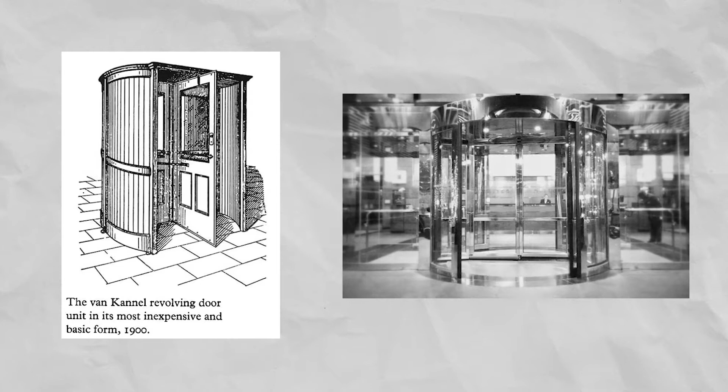Although it was innovative, it wasn't a solution for all the environmental problems of large buildings. Radical mechanical improvements were to be the only solution. It was necessary to have control of humidity from day to night, temperature from summer to winter, and air pollution.

From the first years of the 20th century, two outstanding buildings showed advanced environmental technologies motivated by an external climate containing a local excess of pollutants. The Royal Victoria Hospital in Belfast, Ireland, was the first air-conditioned building in the world, which was capable of controlling heat, humidity, and filtered air. The building used both mechanical and natural ventilation in a compact plan with minimum use of duct.

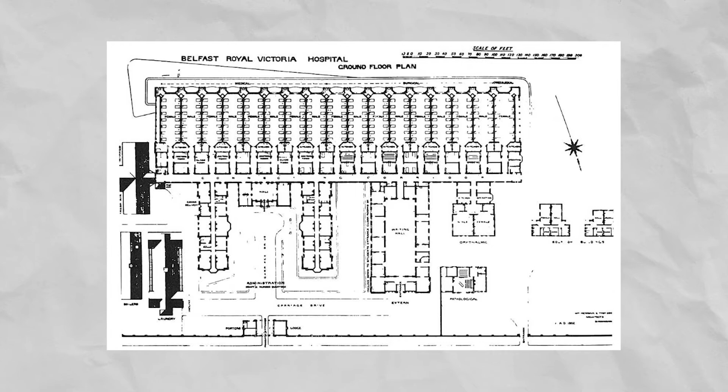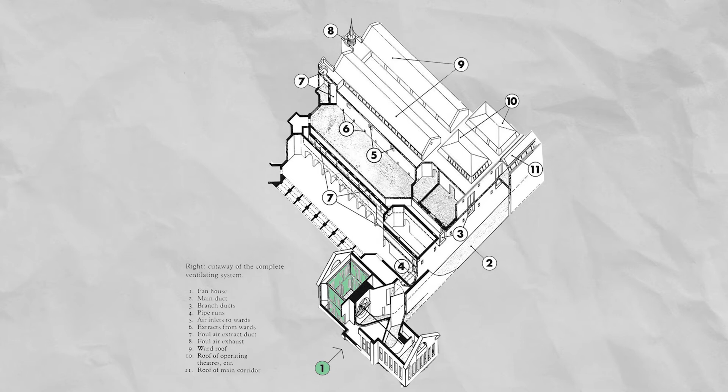Sets of steam engines operated by waste steam from laundry boilers drove exhaust flow fans on a common shaft in the engine room. Output from these fans fed into the inlet, then into the duct. From the giant duct, air moved into distributor channels that were set high under ceilings. From the distributor, air rose through risers in the walls of wards and was delivered through openings above head level. Foul air was disposed through extract ducts and finally left the building through vertical risers. The sprinkler system moistened fiber ropes, then sent the air to heating coils to control both heat and humidity.

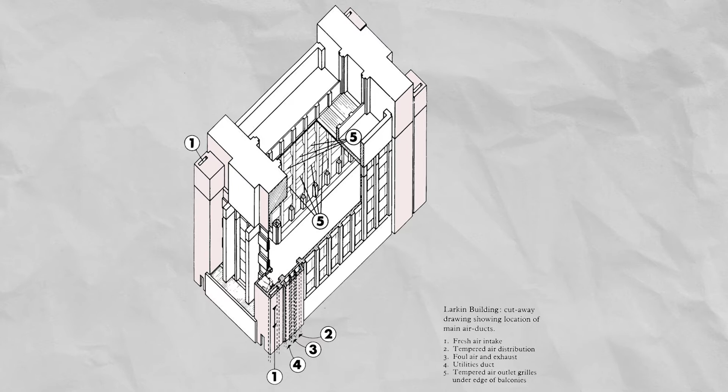Larkin Administration Building was an early masterpiece of modern architecture that was the first air-conditioned building in the country. The use of a vast single vessel of space linked with balconies, using stair towers free of the central block, made the air conditioning possible for the building. These four towers gave a magisterial form to the exterior, which came from a flash of inspiration.

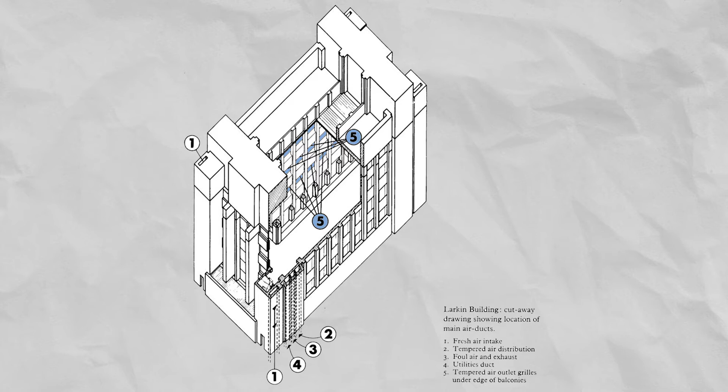Air from well above the external pollutants was drawn down ducts in the blank walls of the corner towers. The tempered air was blown up riser ducts in the massive blank brick panels on the exterior walls adjacent to the stair towers. Then the air was distributed floor by floor through input registers on the backs of the downstand beams under the balustrades of the balconies. The same blank brick panels also had exhaust ducts for air exhaustion. The third duct space in the panel housed pipes, wiring and other utilities. In the basement, air was cleaned and heated, or, after the installation of the refrigerating plant in 1909, cooled.

As environmental techniques have developed, new kits of mechanical devices were introduced, posing both radical problems and opportunities in building design: finding rooms to accommodate the plant and necessary structural changes such as improved insulation, and the freedoms occurring from not having to adapt the structure to husband or create particular environmental qualities.

With a more compact plan that packed accommodations into a single structural volume, Royal Victoria Hospital had total adaptation in section and plan to the environmental system employed. Although considered conventionally conceived in architectural form, it was very modern in the way the parts are functionally disposed along a spine corridor without regard for axial symmetry.

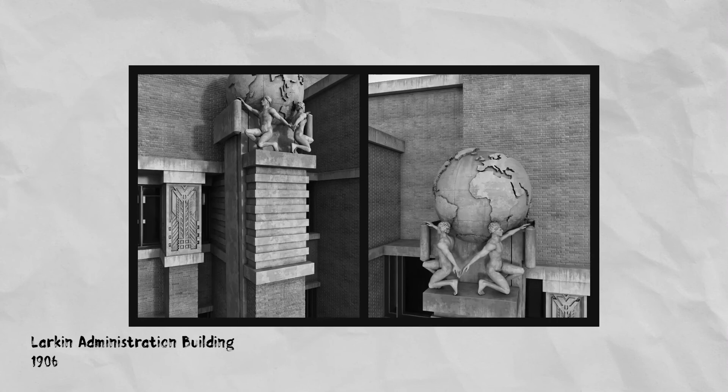As one of the early masterpieces of pioneer modern architecture, Larkin Administration Building's exterior was fascinating and different from classical taste. Like the Royal Victoria Hospital, the final form of the building was imposed by the method of environmental management employed, and the system mediates crucially between interior and exterior form. The transformation of the exterior appears to be keeping pace with the transformation of the interior economy of the building type, allowing the progress of structure and external form in the history of modern architecture.